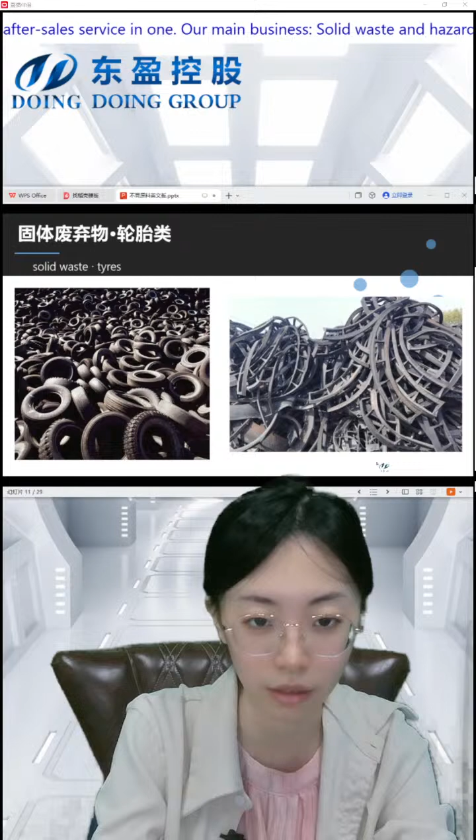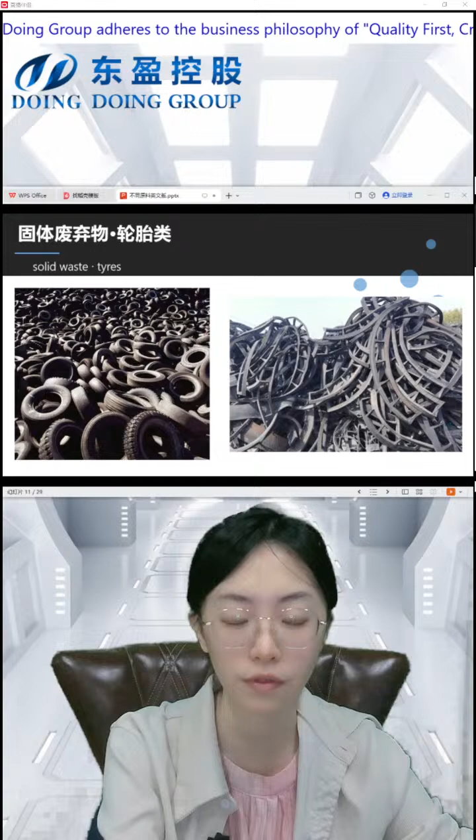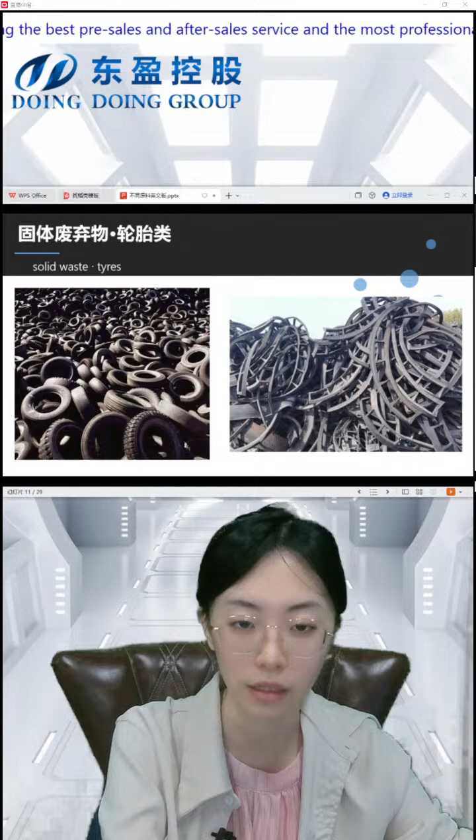But for smaller tires, like a bicycle tire or motorbike tire, the oil yield is lower than the big tire, maybe 35 to 50 or 40. The oil yield is lower, but the price is lower too, so we can also profit from it. We'll choose different kinds of tire, and this is the first kind of raw material, the solid waste, the tire. It shows the different kinds of tire or different kinds of rubber.

The tire includes the rubber. The rubber includes the tire. So here it shows us the big car tires, the truck tires, or the OTR tires. The oil yield is the biggest, 45 to 52. The smaller tires, the smaller car tire, motorcycle, or bicycle tire, are lower, 35 to 40. And we can also get some carbon black and steel wire from the tire. They are also products.

This is the tire, and we also have other rubber, like rubber soles, sheets or carpets, or unclassified rubbers. The oil yield is also more than 30%, depending on the kind of raw material. This is the rubber. Most of our clients choose rubber or tire for the pyrolysis business.

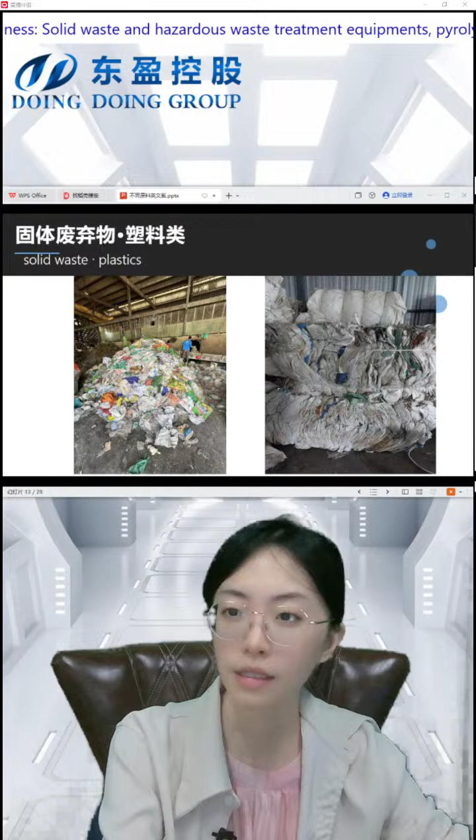And this is the second raw material, the plastic. There are different kinds of plastic, like PP, PE, PS, ABS, PVC, PET. Two kinds of plastic are not suitable for the pyrolysis business: PET and PVC.

These two kinds of plastic are not suitable because they don't have oil contained in them, and they have much more wax, so there will be a very serious problem of clogging in the condensation system. They also have some harmful materials, so except these two kinds of plastic, others like PE, PP, ABS, or PS are very suitable for this pyrolysis equipment.

The plastic we can use in this business also comes from daily garbage or medical waste, like the picture shows here, the plastic bags, the plastic waste. The oil yield is more random because we can't be sure of the water, bricks, or rocks contained in it. So if you have this kind of plastic, you can send it to our factory, and we can do an experiment on the oil yield.

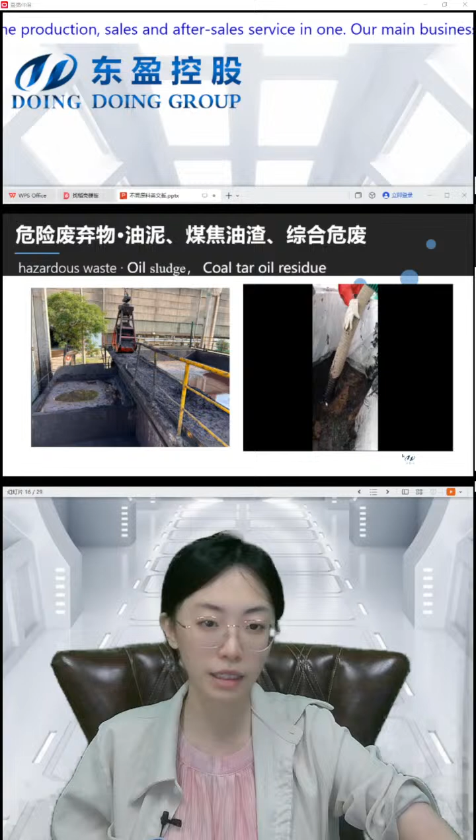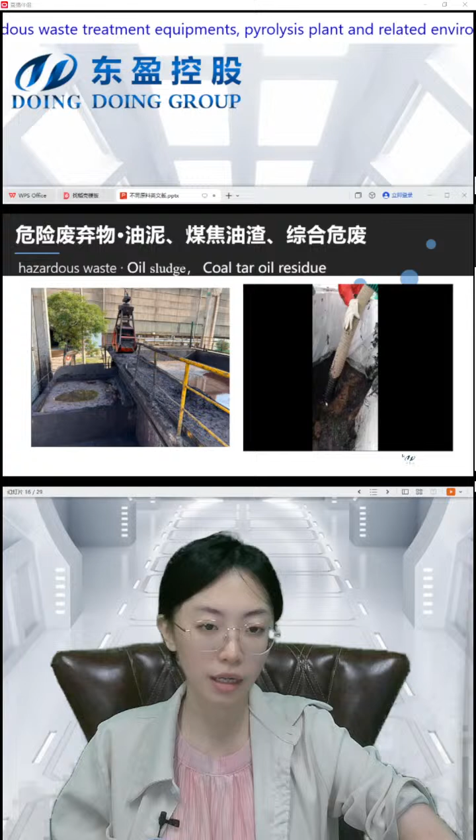And here is the hazardous solid waste, which contains oil that is harmful, some corrosive. So we have other data and policies for this kind of hazardous waste. It includes oil sludge, coal tar sludge, or other mixed oil-containing waste. For example, here is oil sludge from steel mill waste, and here is coal tar residue. It has different states. This is the semi-liquid oil sludge, with much more soil contained.

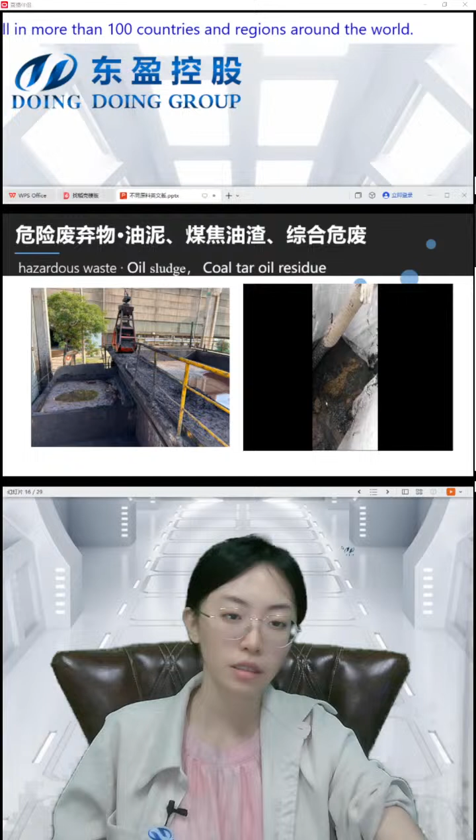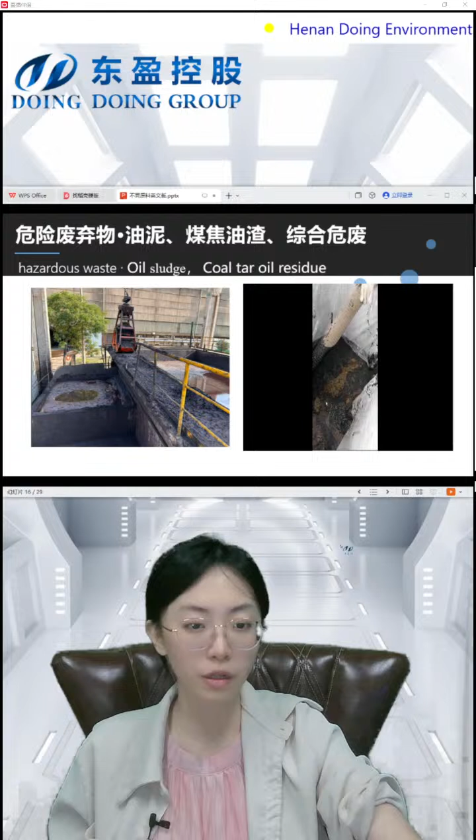We also have other states of the oil sludge, like solid, semi-solid, liquid or semi-liquid. Because the state is different, we need to use different configurations, like a different feeding system, different discharging system, or different pyrolysis equipment. We have three kinds of equipment: the batch type pyrolysis plant, semi-continuous and fully continuous pyrolysis plant, suitable for different kinds of raw materials.

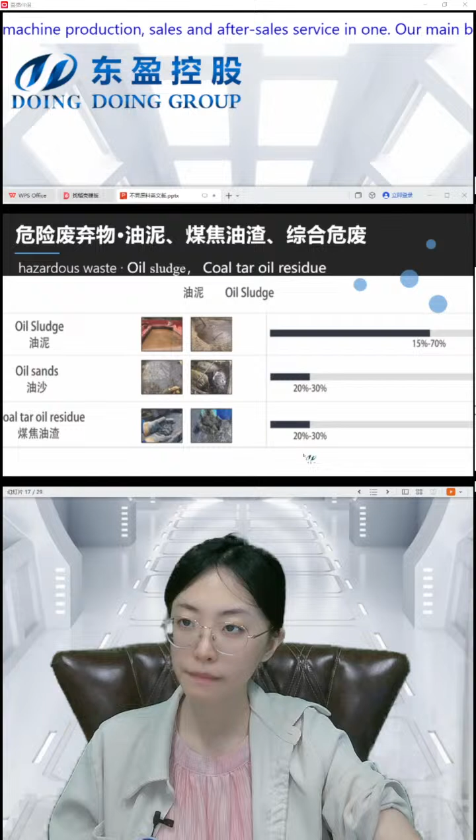This is the oil yield of the oil sludge. You can see because we can't be sure of the water content and the oil content, it's very random, from 15% to 70%. And also for the oil sands or the coal tar oil residue, the oil yield is 20 to 30%.

So this is a kind of hazardous waste. So our reactor furnace material needs to be stainless steel because it's corrosive, and the temperature of the combustion is much higher than for tire and plastic.

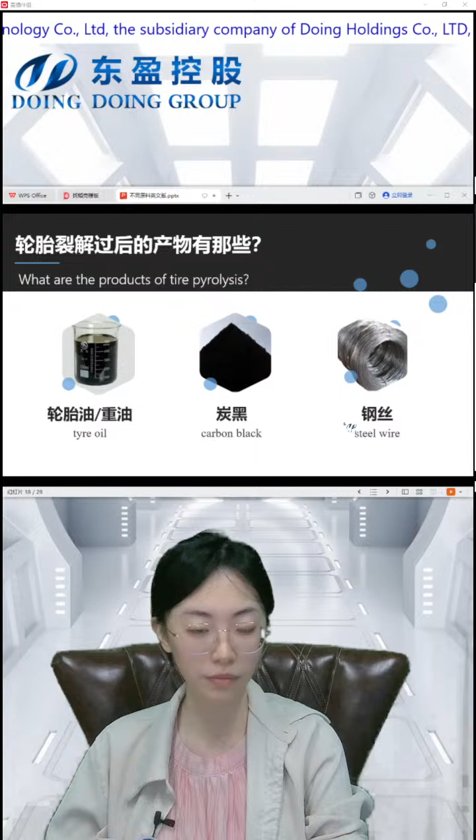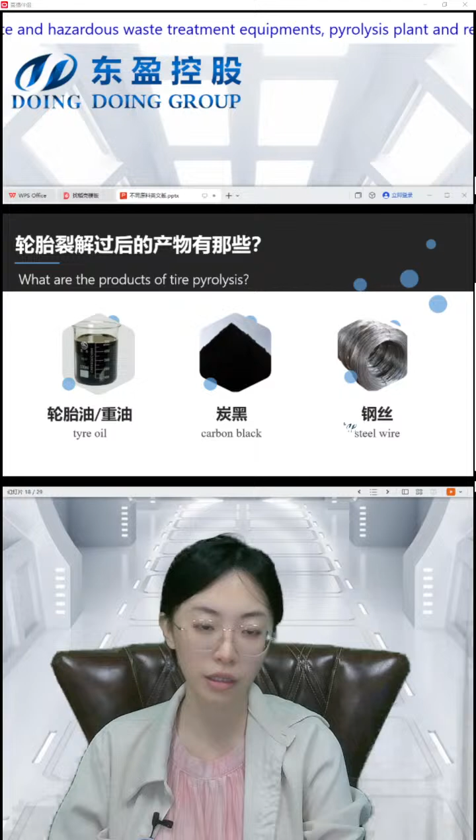And the carbon black also has a high heating energy. It can just replace coal, or it can be a raw material for rubber or paint. This is carbon black. And the steel wire, we can just remelt it, or we can sell it directly. These are the products and the applications of the tire pyrolysis business.

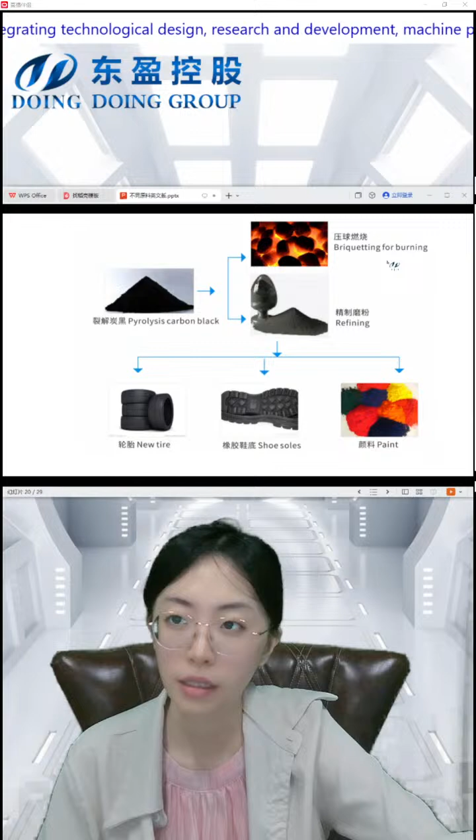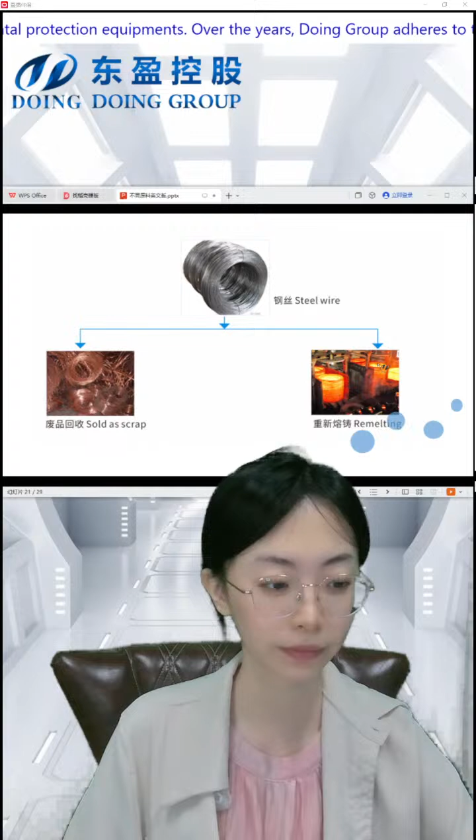And here is the carbon black and its applications. It can just be burned, briquetted for burning, or refined. The refined carbon black can be the raw material for tires, shoe soles, or paint. Here is the steel wire, and we can just sell it as scrap or remelt it. This is for the waste tire.

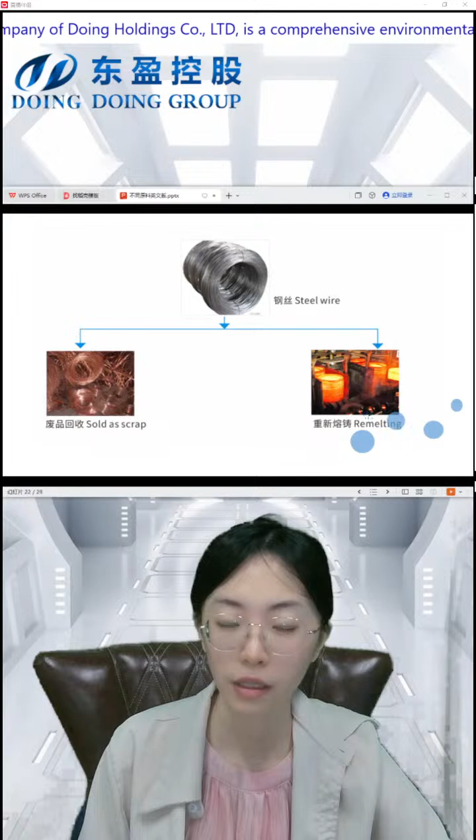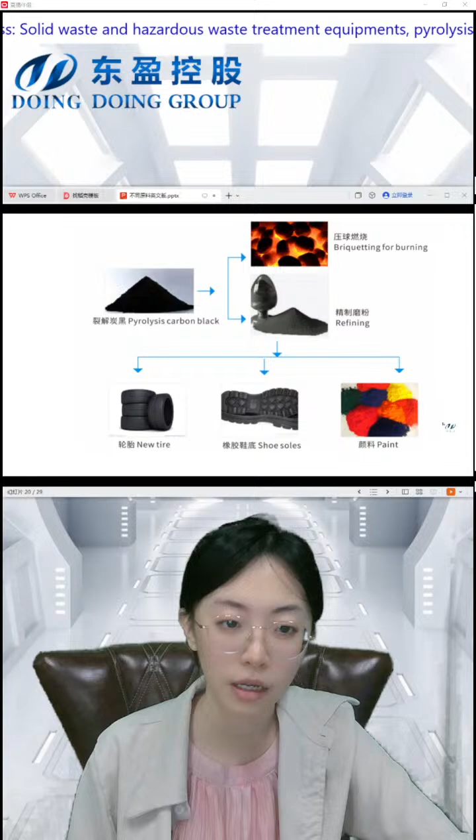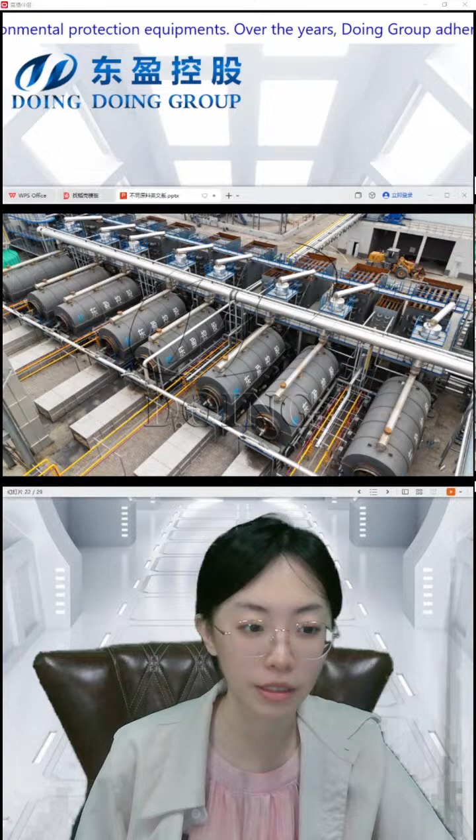Here are some pictures of our equipment. We have three kinds of equipment: the batch type pyrolysis plant, semi-continuous pyrolysis plant, and fully continuous pyrolysis plant. This picture is a batch type pyrolysis plant for oil sludge and coal tar residue. The capacity is 15 ton. We have 10 ton, 12 ton, 15 ton, 18 ton, and 20 ton batch type pyrolysis plants.

This is the reactor, and here is the condensation system. We get the fuel oil from condensation, and it is temporarily stored in the storage tank. Here is a clearer view of the water tank.

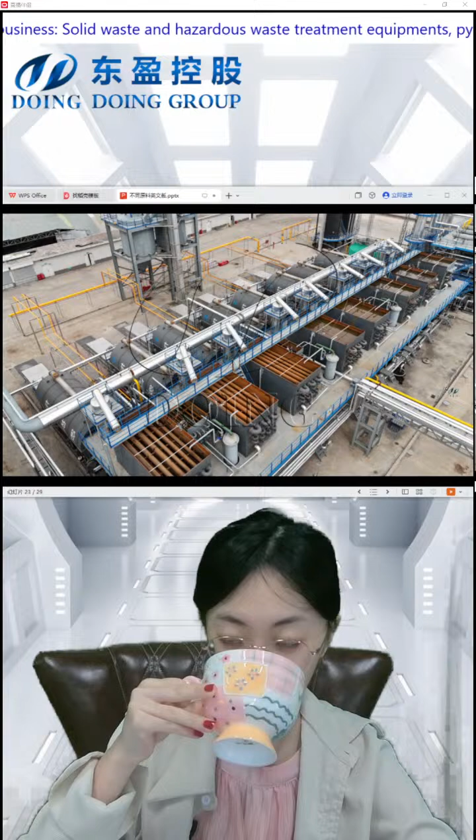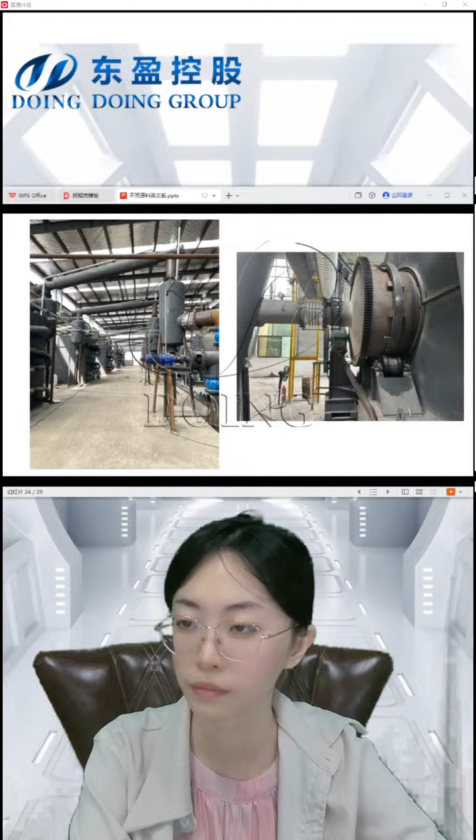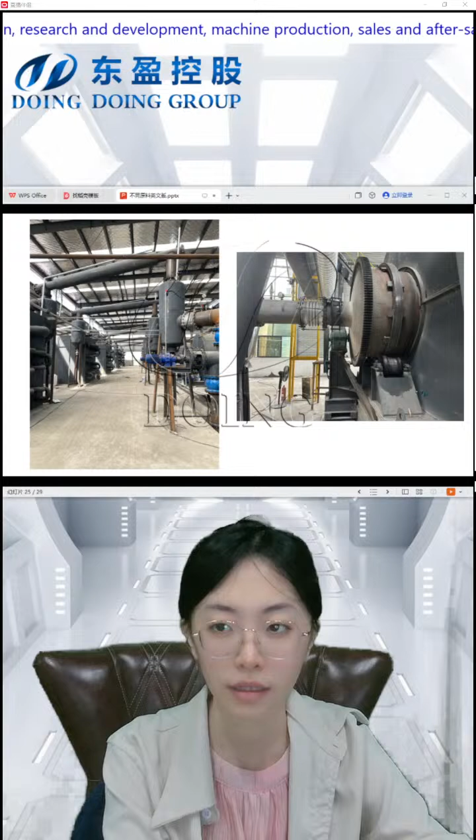There is the outlet. The outlet is connected with the buffer tank. Here is a tub. The tub is not directly in contact with the reactor; it uses the straight rail to contact with it, to ensure there is not much temperature contact with the tub, because it uses lubricating oil to lubricate. So if it doesn't touch the high temperature things, we won't have lubricating oil waste or smoke. It's very environmentally friendly.

So here are some details, and the oil will get out from here. First, it will come to the buffer tank. The buffer tank has two effects. The first one is to condense the carbon black mixed with the flue gas. And the second is to slow down the speed of the oil gas, so it will be condensed in the condensation system.

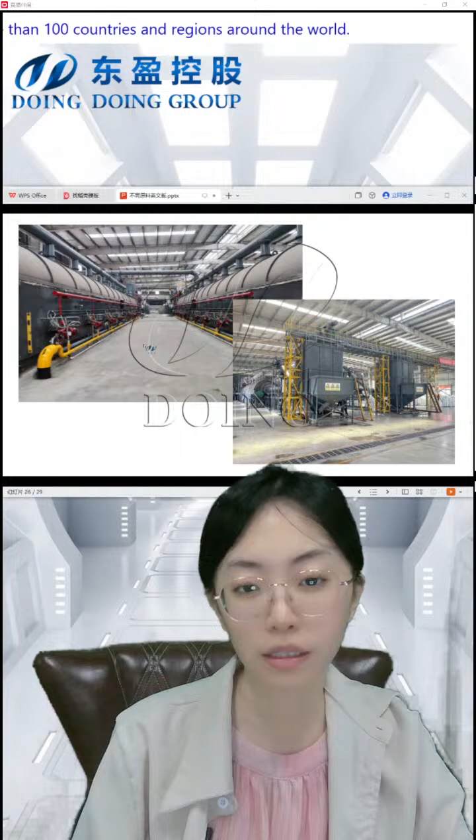These two pictures show the batch type pyrolysis plant. Its efficiency is one batch for 1 day. And here is the fully continuous pyrolysis plant, which has a much higher efficiency. It can work 24 hours without stop, for 45 to 60 days. So most of our customers nowadays choose this fully continuous pyrolysis plant. It's much more environmentally friendly because it has a sealed design for the feeding system and the discharging system, so we don't have carbon black dust during the application.

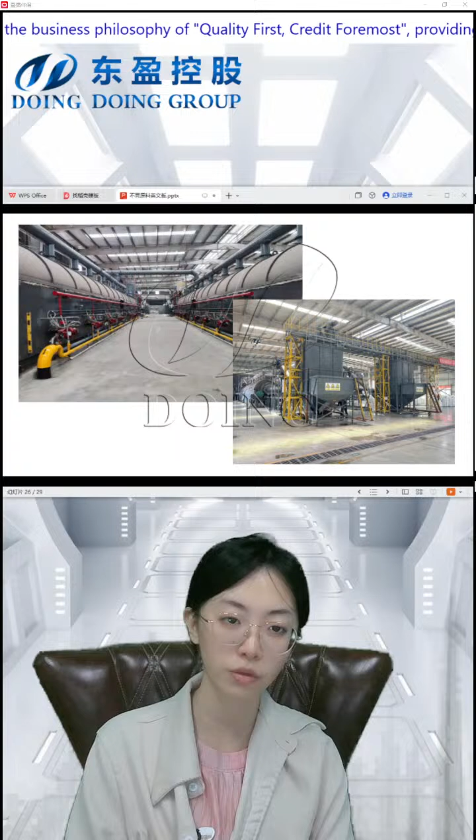Also, the fully continuous pyrolysis plant capacity is much bigger. It's 50 tons per day. The biggest one is 50 tons, and 40 tons, 30 tons, and 15 tons can also be chosen. So if you have the business and much more raw materials to be processed every day, you can choose the semi-continuous or the fully continuous one. Its technology is newer, and you also have a PLC system to automatically control the whole production.

Here is a feeder. We need to feed it with rubber powder, so we need pre-process equipment to crush it to powder and to separate the steel wire by the magnetic separator.

And this is the insulation cover that we have for the fully continuous plant. Here you can see the temperature is 31 degrees during production, so it's very safe for the workers to touch the insulation cover. The temperature inside is 400, but the outside is lower than 35. We have 6 layers for the fully continuous pyrolysis plant to keep the temperature and to prevent the release of smoke gas.

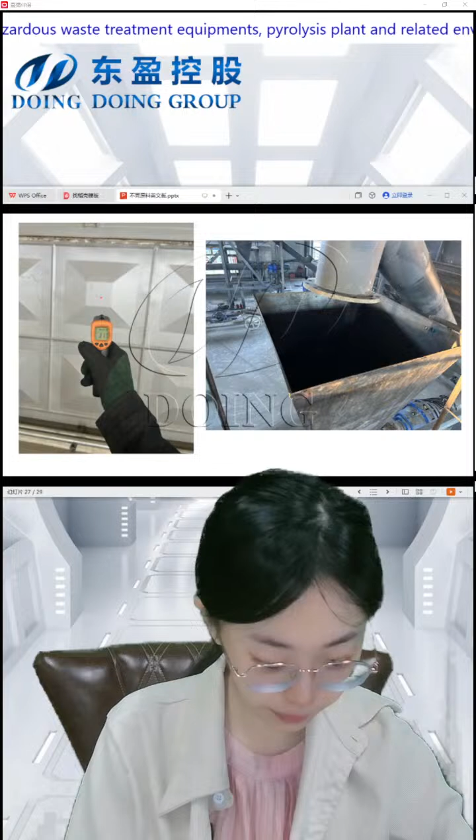And this is the condensation system. Here is the reactor, and outside is the condensation system. We have 2 kinds of condensers. One is the tube condensers; here are the tube condensers. The one I showed you before is the water tank condensers. The water tank has a coiled pipe in it. The flue gas goes through the coiled pipe and contacts with the water outside, so it can condense to oil.

But different from the water tank, the tube condensers go through 7 condensers in different steps. The first is 2 vertical condensers, and the second is the oil water separator. It can not only condense the oil but also purify the gas and prevent it returning to the reactor, also as a safety device.

And the third is the horizontal condensers. It has 37 pipes in it. It has the biggest efficiency of the condensation system and will condense most of the oil; 90% of the oil will be condensed here. And the final step is vertical condensers with 1 pipe in it to ensure all the flue gas is condensed. And this is an odor removal system to purify hydrogen sulfide in the gas.

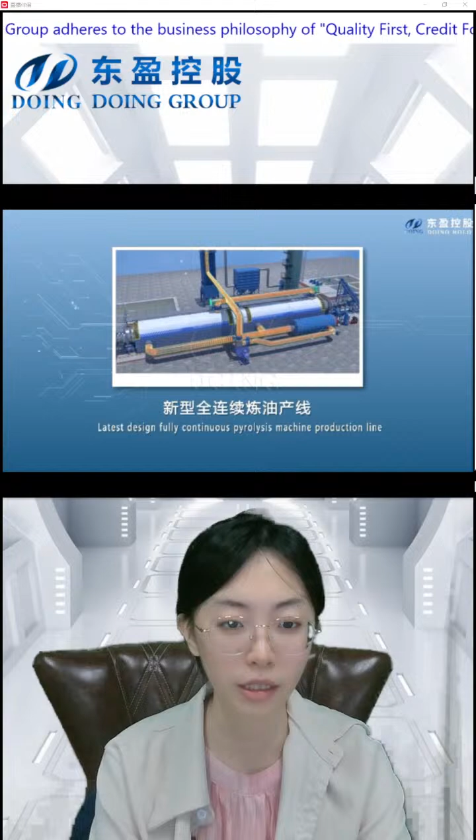Okay, and this is all the PowerPoint we showed you. Here is the 3D video designed by our engineer. You can have an intro. It's much clearer to see the whole production line.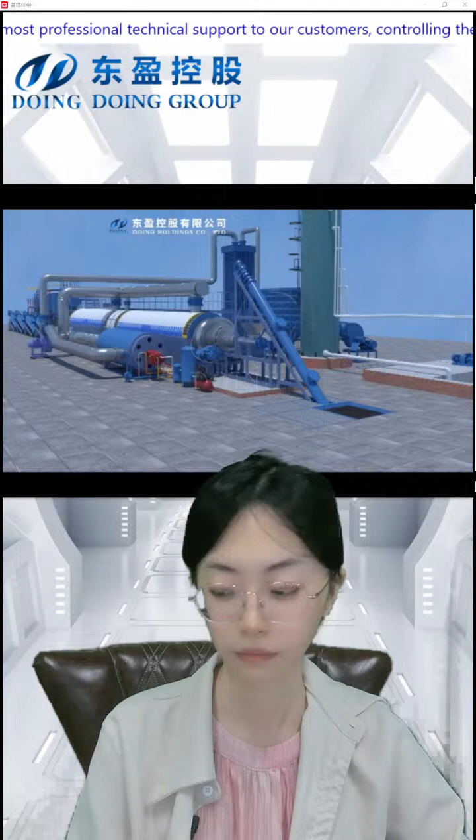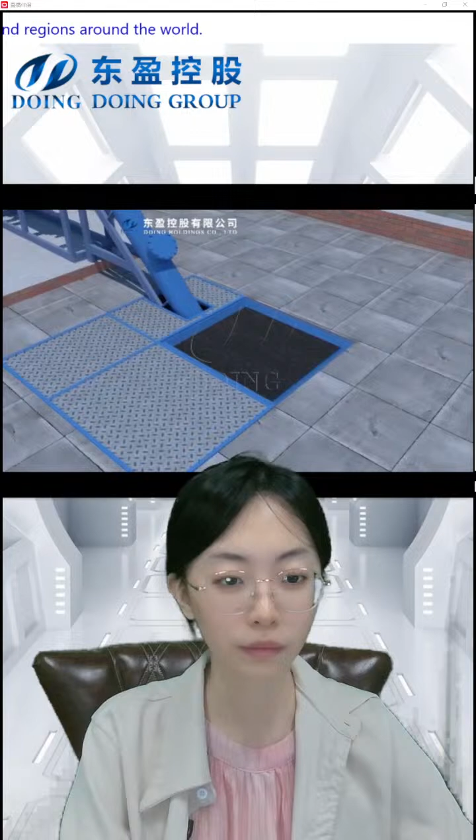Well, for the fully continuous one, 15 tons is the smallest capacity, and the biggest one is 50 tons. So it can ensure different capacities and reach the different standards of your capacity and the quality of your material.

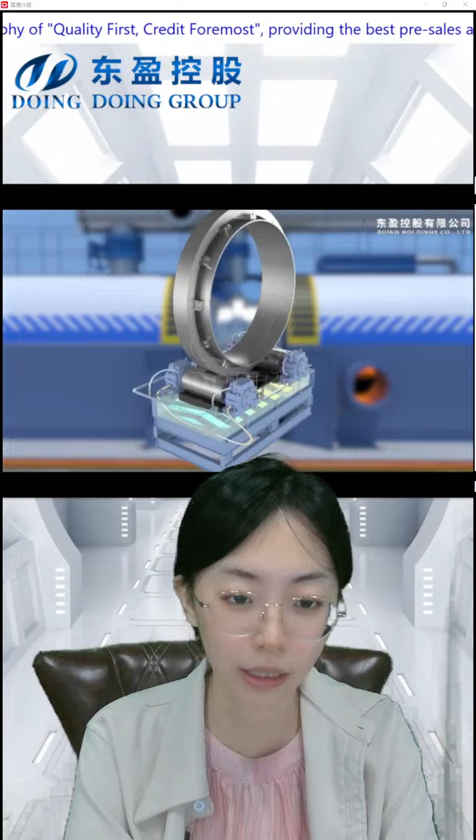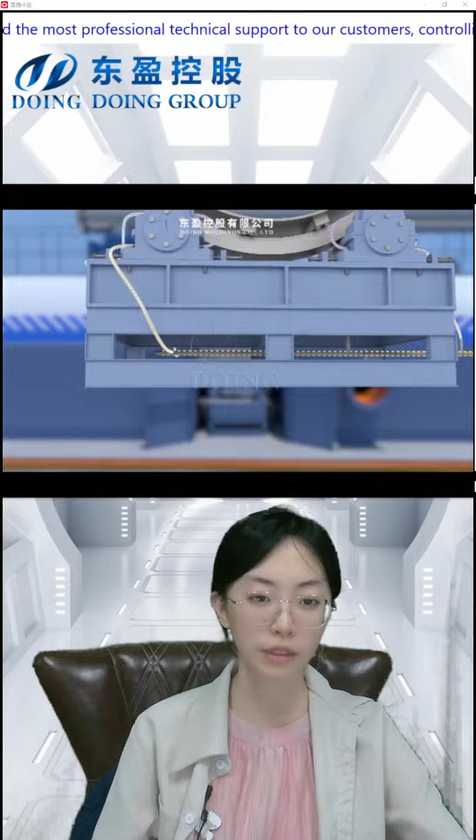We are the manufacturer of pyrolysis plants for waste tire, waste plastic, oil sludge, and coal tar sludge. This is the fully continuous reactor. Any questions you have, you can just ask, or we will give you an introduction later with more details of this equipment.

Well, for the fully continuous one, we have different steps: the pre-processing step, the feeding step, the pyrolysis equipment, the condensation system, the purification system, and the discharging system.

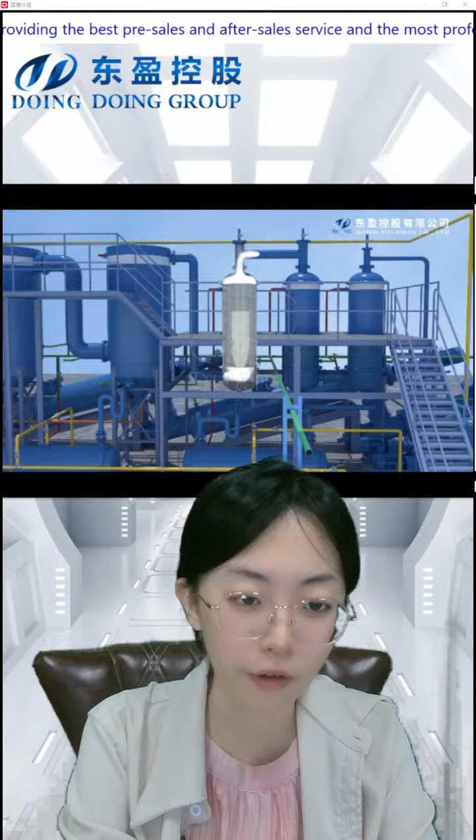Here is the condensation system. Well, the fuel oil can be used as heating energy, burned at cement factories, glass factories, brick factories, or in generators. Or we can also refine it to diesel to promote the quality. This is what our product can be used for. And this 3D video shows how we get the fuel oil from waste tire and plastic.

Here is the odor removal system. It's also our patent. We put sodium hydroxide in it, because our gas will have some sulfur dioxide. It's harmful for the body and the environment. Also others, like nitrogen oxides.

Then we can purify it and send it back to the reactor heating system by the tail gas burner, or this hot wind furnace. Now we have renewed our design. Before, we used this burner and the tail gas burner, and now we use this hot wind furnace. It heats the reactor more evenly.

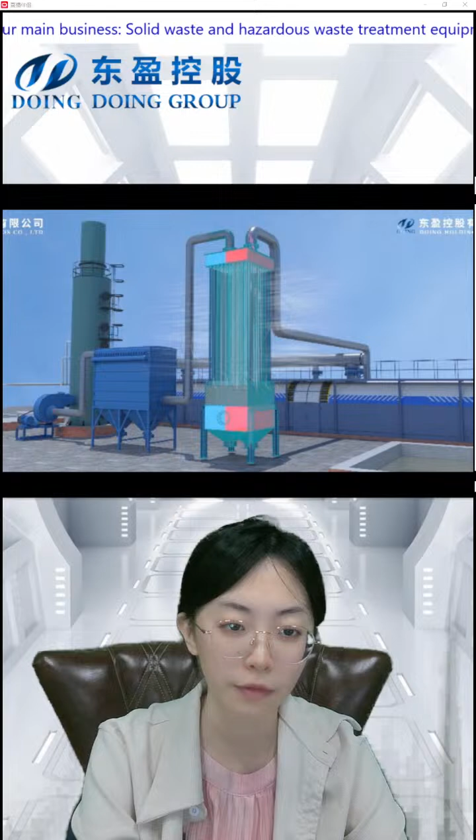And this is the odor removal system, the desulfurization system. When we heat the reactor, it will have some smoke. We need to release it, but we can't release it directly. We need to purify it by this dust collector or the desulfurization tower.

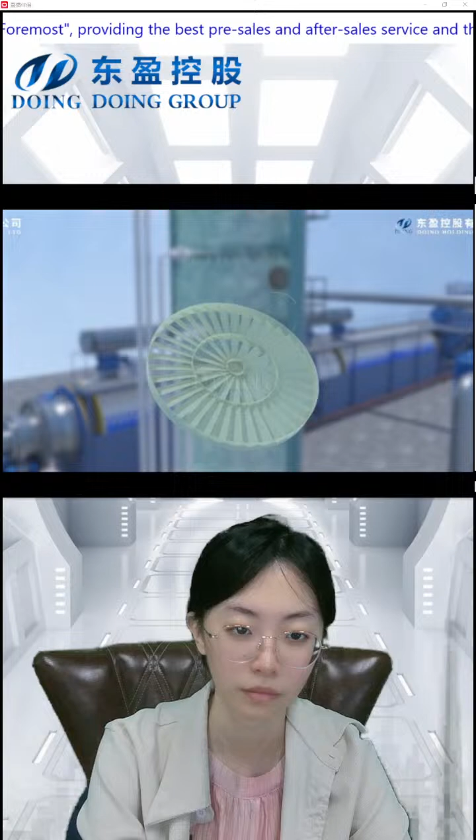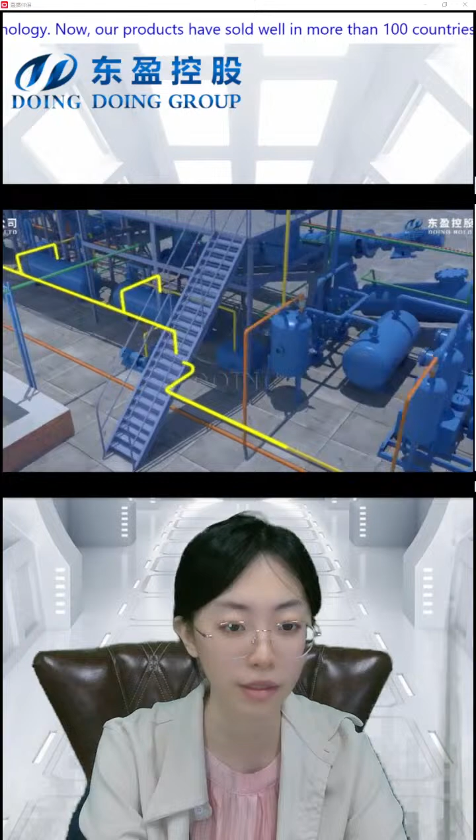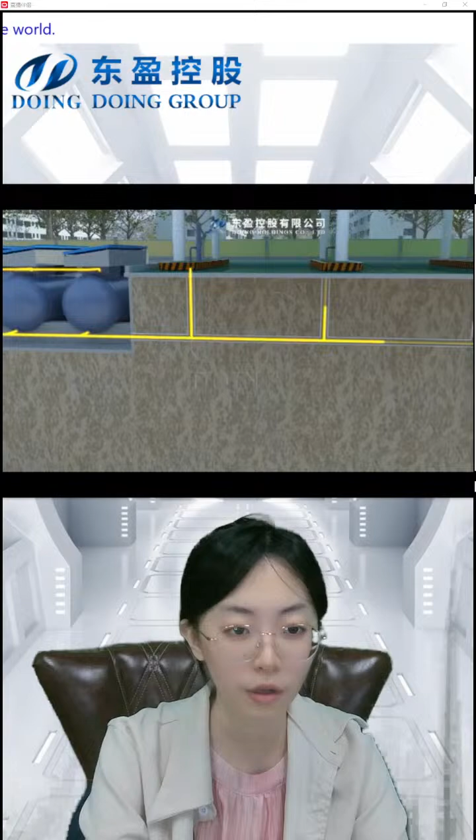And the gas that we release can reach the different standards of different regions. Like in China, different provinces have different policies for emissions. We have monitoring of sulfur oxides, or others like hydrogen sulfide. So we need to purify it.

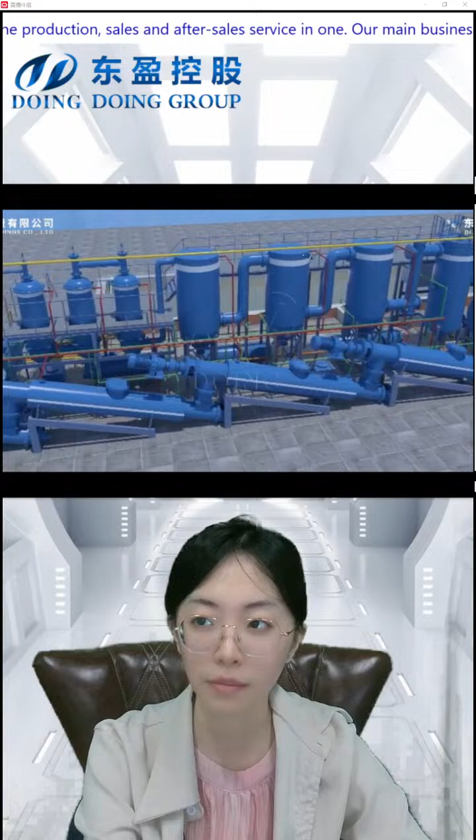So let's start from the beginning and have some more information. For the fully continuous one, we have automatic monitoring, the PLC system, to control the whole process and the whole production. And this is the control panel. For the equipment, we have the pyrolysis equipment. Here is the discharging system, and above it is the condensation system. And here is the purification system.

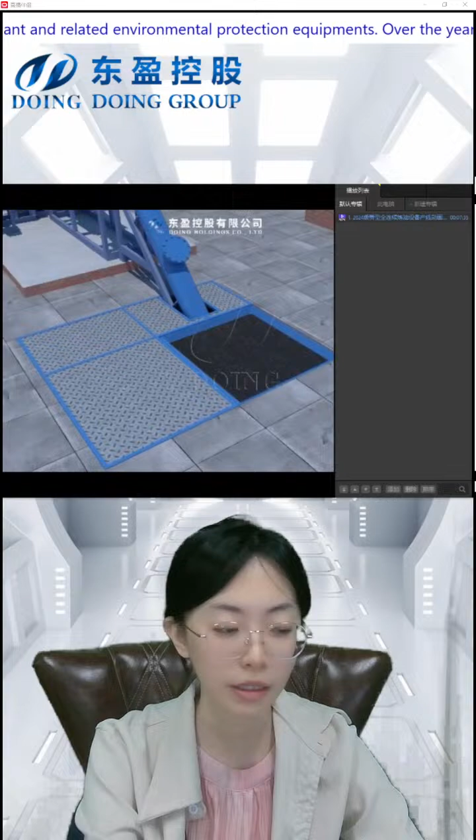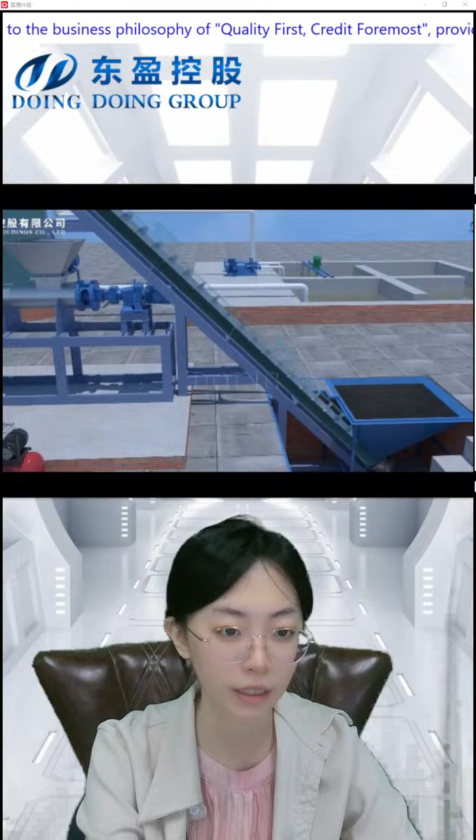First, we need to feed the raw material. This is the rubber powder we feed by using the feeding winch. Then it gets to the hopper. The storage hopper puts the rubber powder into the horizontal winch and into the reactor. The heating energy comes from a hot wind furnace heating the reactor, in an indirect way.

Well, the temperature now is nearly 400 degrees. The reactor is much longer than the batch type, so we have two sections. In the middle is a temperature-resistant tube. Outside the tube is lubricating oil. We use recycling water to lower the temperature of the lubricating oil, or there would be much more waste and much more smoke.

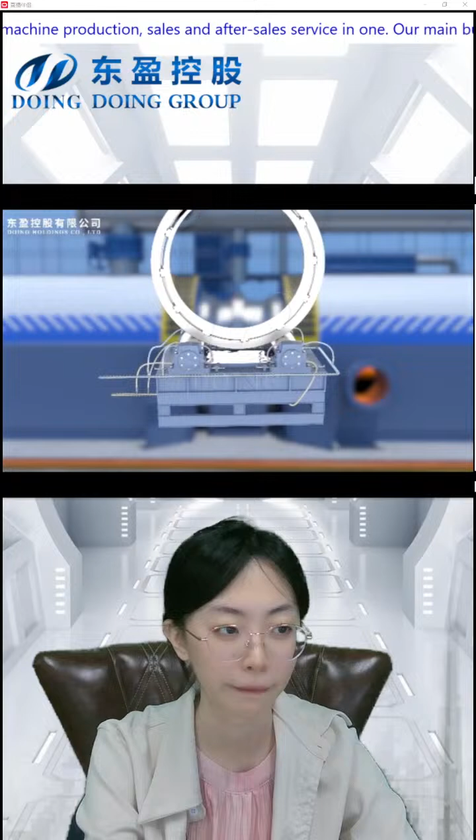Here is the outlet. For nearly 4 hours after feeding, we can get the gas. The flue gas will first come to the condensation system. This is the buffer tank. It has two effects: the first one is to settle down the carbon black, and the second is to slow down the speed of the flue gas.

Then we will get it to the condensation buffer tank. It will also have the same effect as the buffer tank, but outside it is a water cover. It will cool down the temperature and cool down the flue gas into the oil. It will use the U-pipe, then come to the temporary storage tank. Outside is also a water cover to cool down the oil, or it will damage the oil pump.

And here are 3 vertical condensers, with many pipes in them to spray, in full contact with the circulating water. Here is a negative pressure device to ensure all the gas will come out from the outlet of the reactor and come to the condensation system.

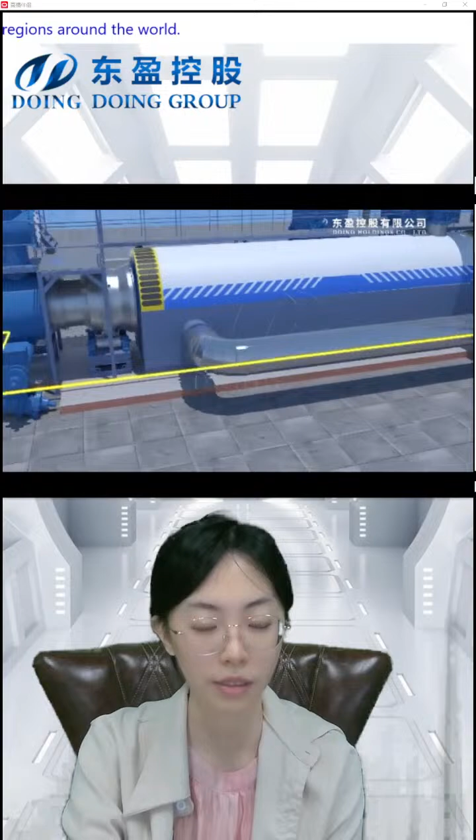This is the tail gas removal system to purify the bad smell of the tail gas. The first one is a buffer tank, and the second is a spraying tower to purify it, and then it will come to a water seal and go back to the reactor as heating energy. So for nearly 8 hours, we can use natural gas or fuel oil to burn the reactor, and for the next 45 days, we don't need any extra heating energy. We can use all the tail gas to burn the reactor. It's a flue gas.

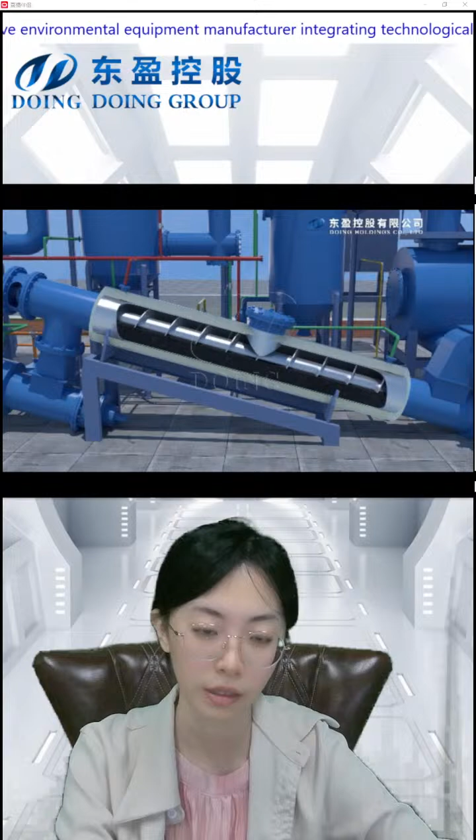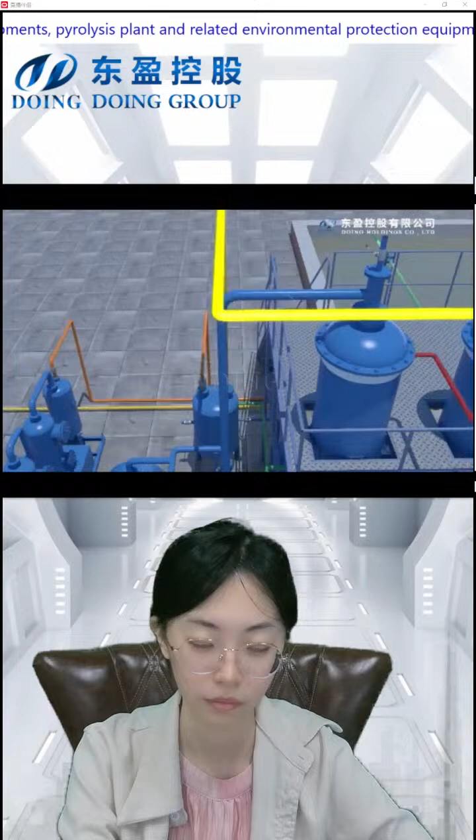Then about how to discharge carbon black, we will use the slag discharge winch to discharge it. Outside is also a water cover to lower the temperature of it. Then we can just bag it directly when it goes through 3 or 4 winches. Then here is also a water sealed safety device. You can see one pipe is lower in the water to control it.

And about the smoke that we need to release, we have the odor removal system, the purification system. This is to lower the temperature, the condensation, and then it will come to the carbon black collection device to sort the dust. Here is a glass fiber tower, the desulfurization tower, to purify the sulfur dioxide. This is to spray the gas, and this is to collect the water.

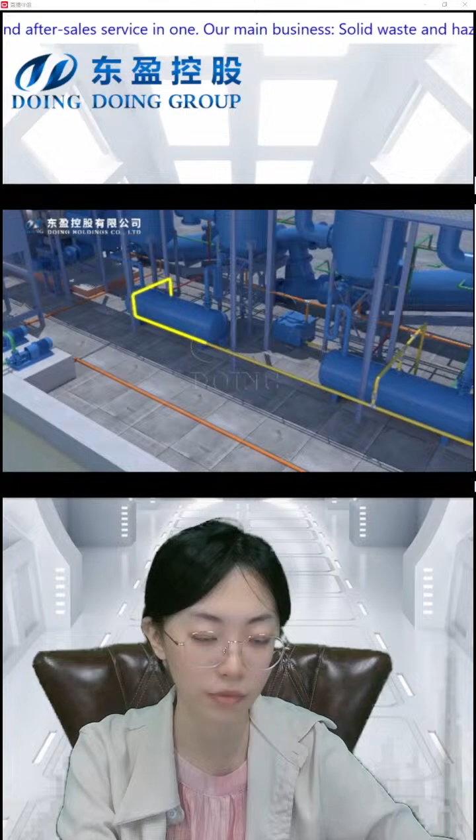So when the gas is released, it can reach different standards of different regions. We have a high standard purification system and a lower standard purification system, which can reach the requirements of your region's policy. This is the last step. We can just collect the oil by the oil pump and pump it into the larger tank. Here is the entire fully continuous pyrolysis plant.

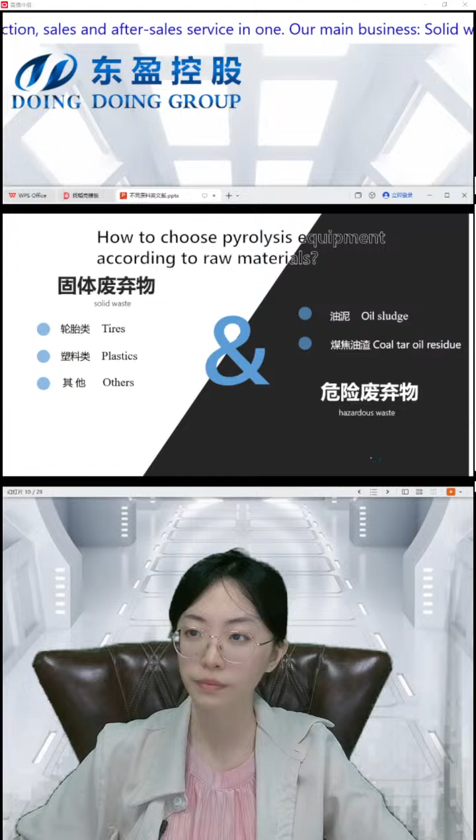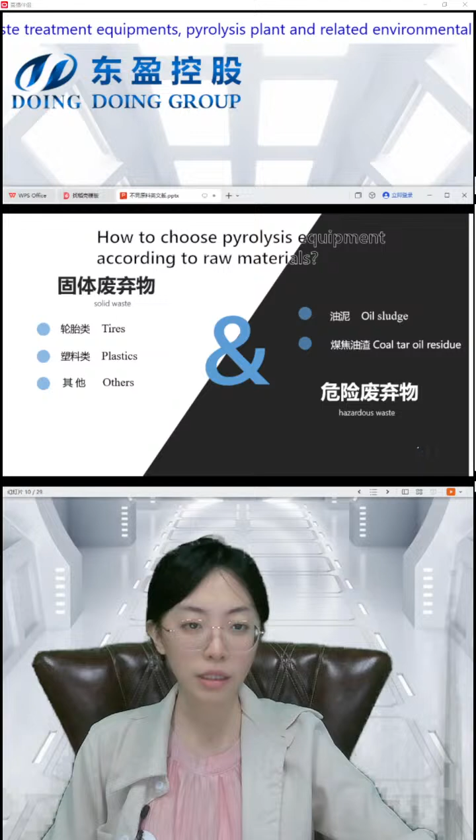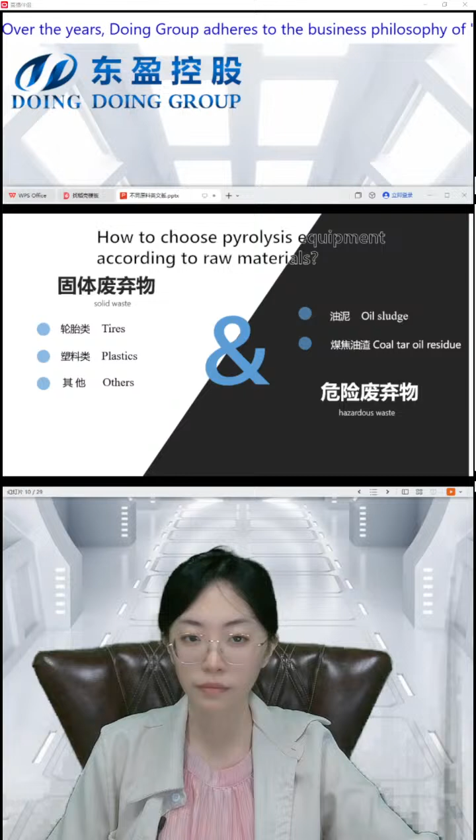And this shows the raw materials that can be used for the equipment, solid waste and hazardous waste. For the waste tire and the waste plastic. For the plastic, most of it is garbage, plastic bags, woven bags, or medical waste.

And this is the hazardous waste, most of it is oil sludge or coal tar oil residue. You can see this is the state of it. For the semi-solid oil sludge, we can do a drying pre-treatment.

And this is the hazardous waste oil yield. We can see here it is 15 to 70%. It will depend on the water content and the oil content in your oil sludge, or whether there is any rocks, soil or bricks in it. This is the oil sand and the coal tar residue.

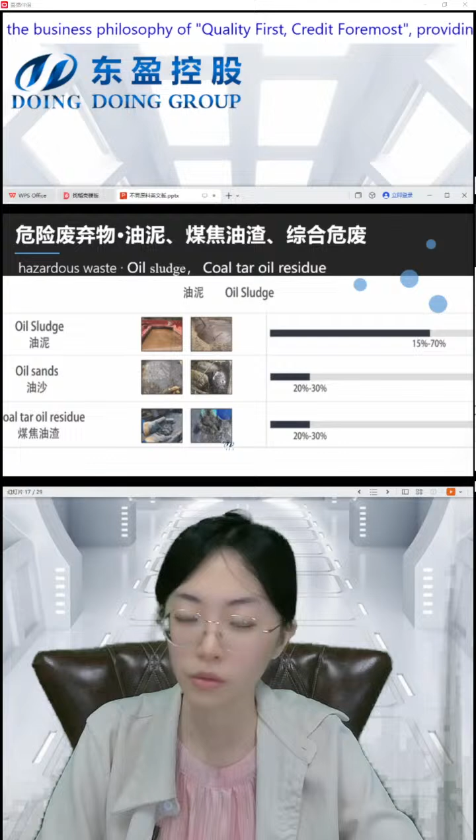So here are the products we can get from the waste tire: the tire oil, the carbon black, and the steel wire from the tire. The oil yield of the waste tire is 35 to 45%. It will depend on different kinds of tire, like the big tire or small tire. The oil yield is different.

The ways we use it: for the fuel oil, we can use it at the brick factory, cement factory, glass factory, or we can refine it to diesel. And here is the carbon black, to burn it or refine it.

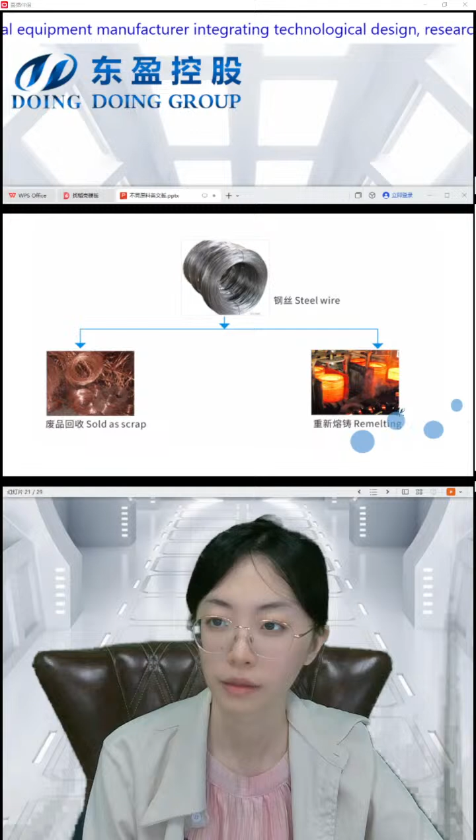And the steel wire. Well, if you choose the fully continuous pyrolysis plant, first in the pre-process system we need to separate the steel wire from our raw materials. Then what we get is grade 1. The steel wire quality is much higher than when we use the batch type pyrolysis plant, because with the batch type, the last step is to pull the steel wire from the reactor. So the quality is much lower; it is the black steel wire.

And these are some pictures that we have.

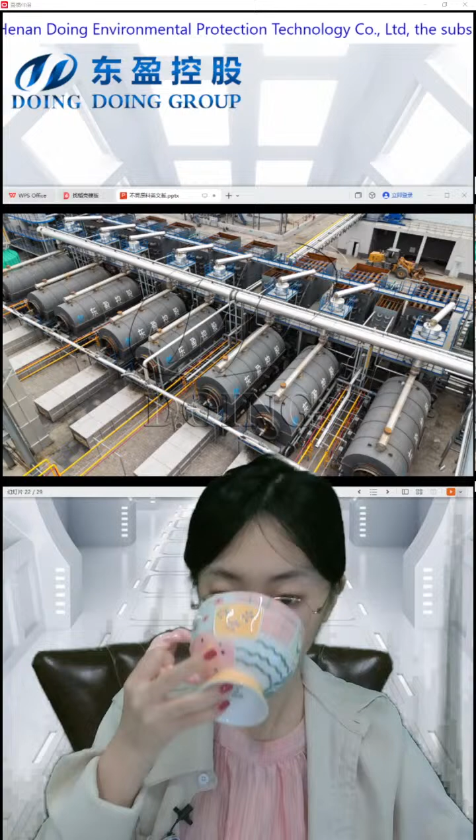This is for the oil residue, and the heating system this customer chose is the gas burner and the coal to burn it, because the raw material of this customer is a coal tar oil residue. So one of the products is the coal, and then they can just use it directly in the furnace. Here is the oil tank separator.

And this is also a batch type pyrolysis plant for the waste tire. It will be crushed into particles. When we put in the particles, we can put much more than the whole tire. For example, if you choose the 15 ton batch type pyrolysis plant, if you just put the whole tire, then we can put 12 or 13 tons of the material. But if you use these particles or the rubber powder, then we can put 14 or 15 tons of the raw material. It will save the room inside the furnace.